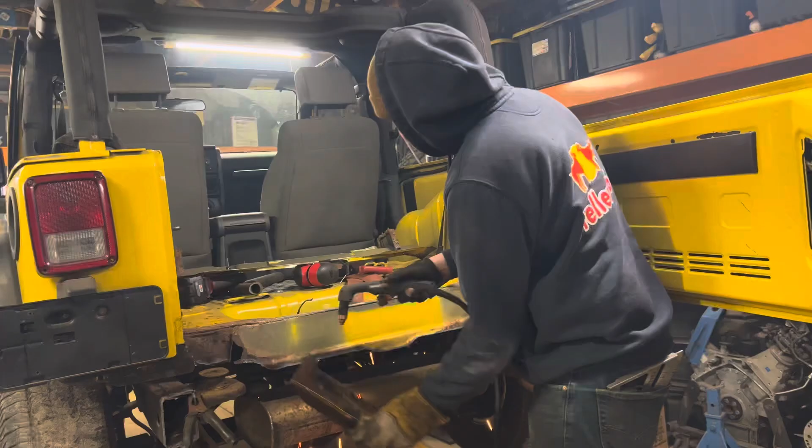You saw in that last clip, Nick actually cut the whole back piece out of the tub, and this is the final result after he replaced it. This Jeep was so rusty that the tailgate wouldn't even close because there were huge rust holes here, so he put a lot of work in to fix this, and yeah, it's a lot better.

And after those clips, an embarrassing amount of time lapsed, and we also opted not to build a rear bumper, just to put a crossmember in. So today I'm gonna make up some rear crossmember for this Jeep.

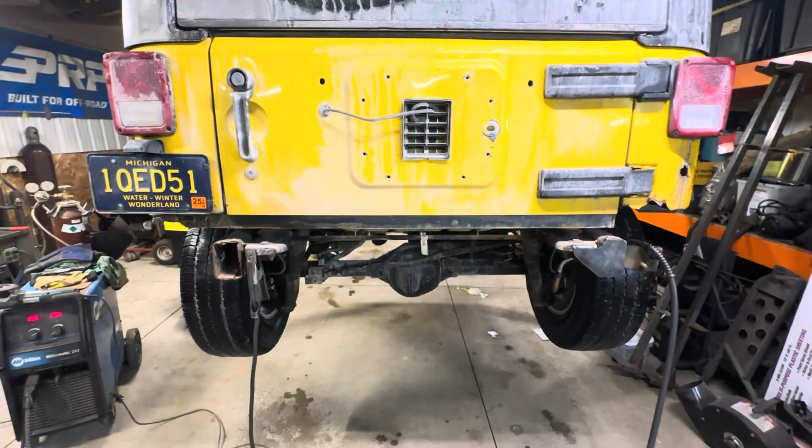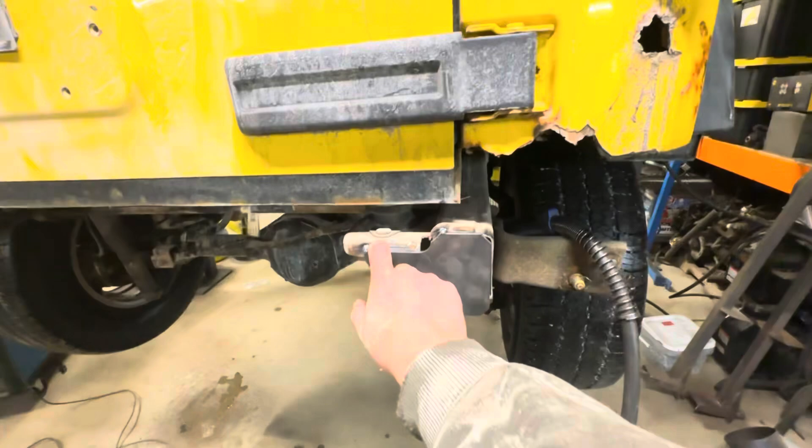I already did a little bit of preventative maintenance, some brakes on the front, and got that all wrapped up, but I've been putting off making this rear crossmember for a long time, so I'm gonna make up some brackets. I kind of already got one halfway mocked up here real quick. I'm gonna just buzz it in, put a bar across it, put a hitch in the middle of it, and toss this plastic bumper back on and go from there. Be something better than nothing and get us down the road.

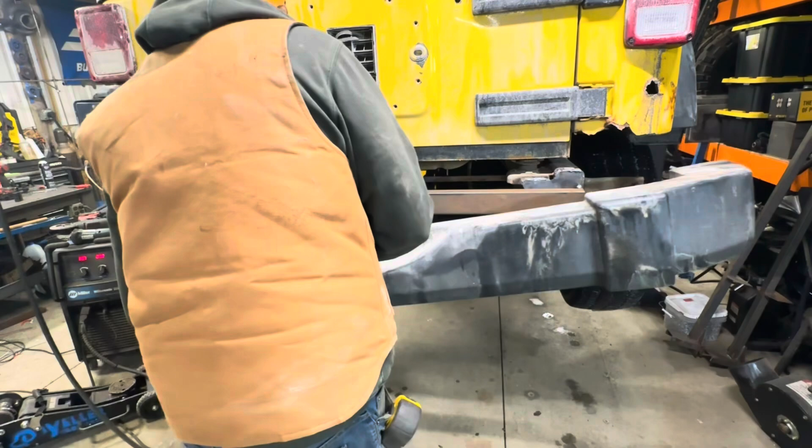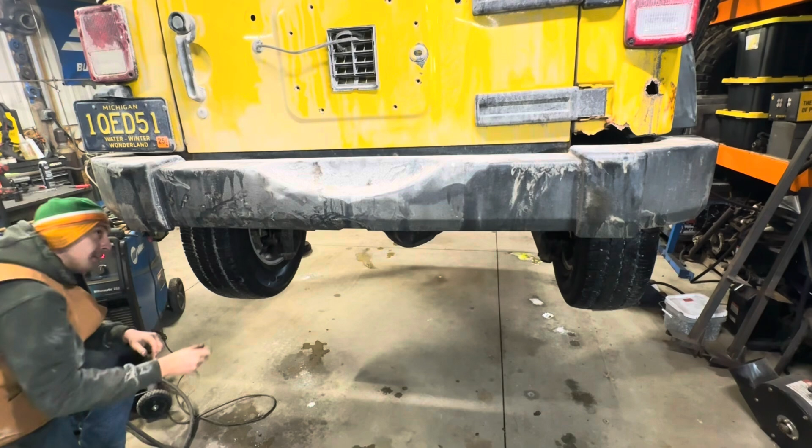It fits really nice.

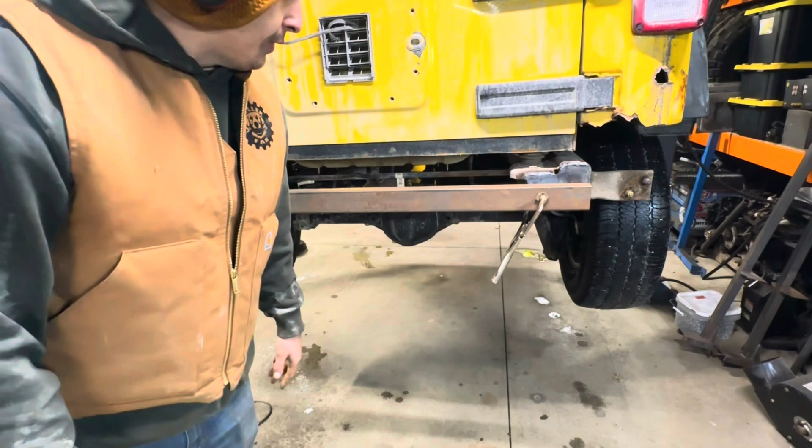This is, I don't know, 2.5 by 1.5 inch, probably just north of a 1/8 inch, maybe closer to 3/16 piece of square tube. I'm just gonna kind of eyeball this up.

I'll make up some gussets for a hitch mount. I gotta see if I can find a hitch mount that I can snag apart, because it would be nice. I might even add some plates on the side here to kind of cap this and give it some extra strength. I'll get this all tacked together and then put that bumper back on, make sure I got enough room down here to put a hitch, and if not, I'll cut my plastic bumper up so that I can, because I just want a hitch.

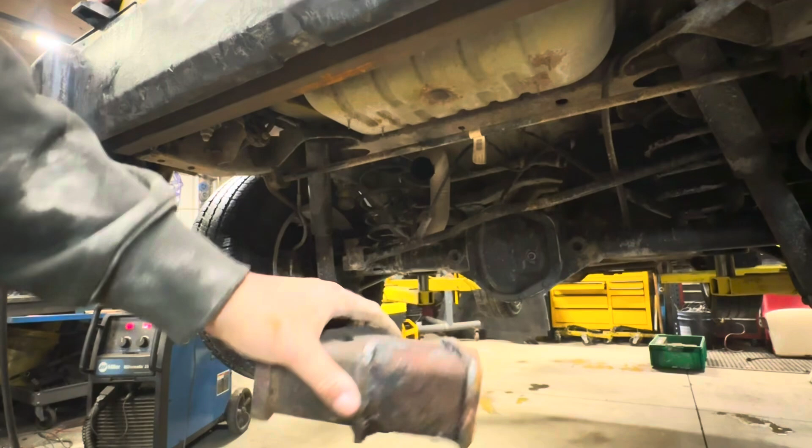Alright, I found, actually I'm pretty sure this is the hitch that was on here. So I'm gonna go over to the bandsaw and try and clean up some of this, get it closer, ready to cut, and we'll go from there.

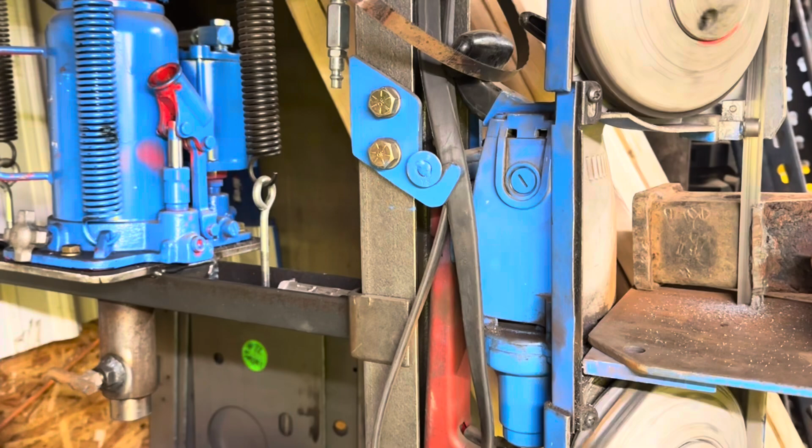All right, so that's at least roughed in, and now I can go over and get the grinder out and clean this thing the rest of the way up. So I got that cleaned up. Should be ready to get put on here.

Cool, make a gusset like this. Gusset like this.

Day 2. I have to get this done tonight because Beck has to drive to work tomorrow. So let me see if I can't knock this out today and have a nice, actual, workable hitch. Designed a few things up last night.

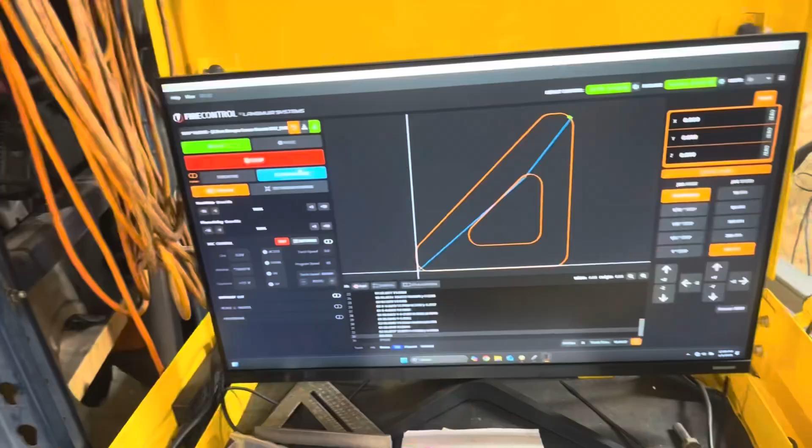So yeah, here, I'll show you. Here's a quick, just lower gusset. I'm gonna buzz one of these out and see how this looks.

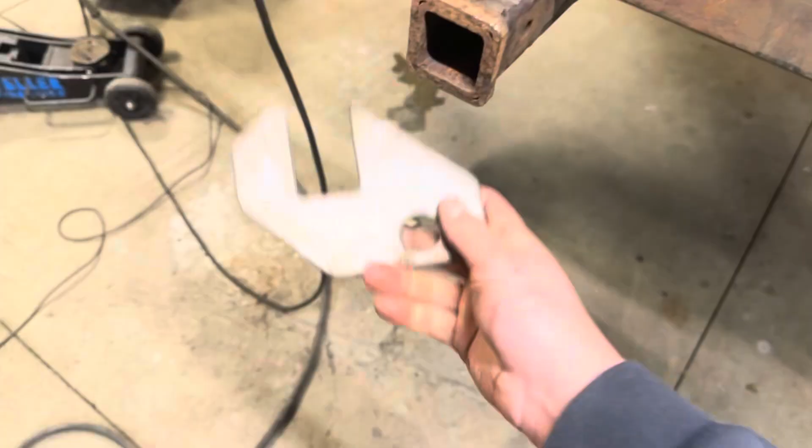I want to make some nice gussets for this to sit, so I have a little bit of grinding to do to get this all lined up. I gotta go cut another one of these real quick.

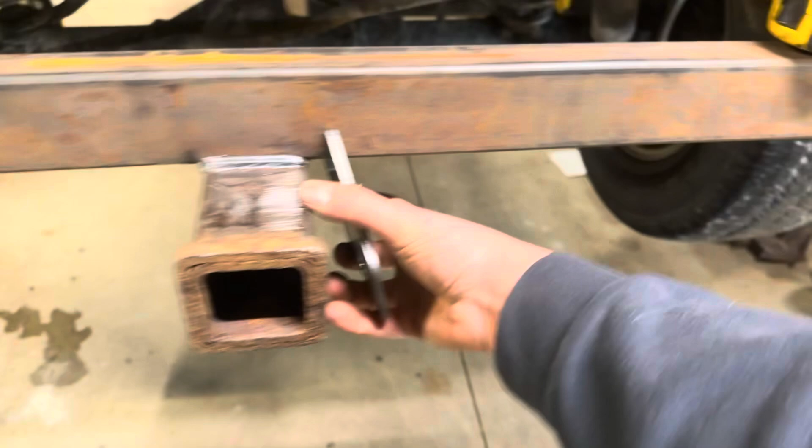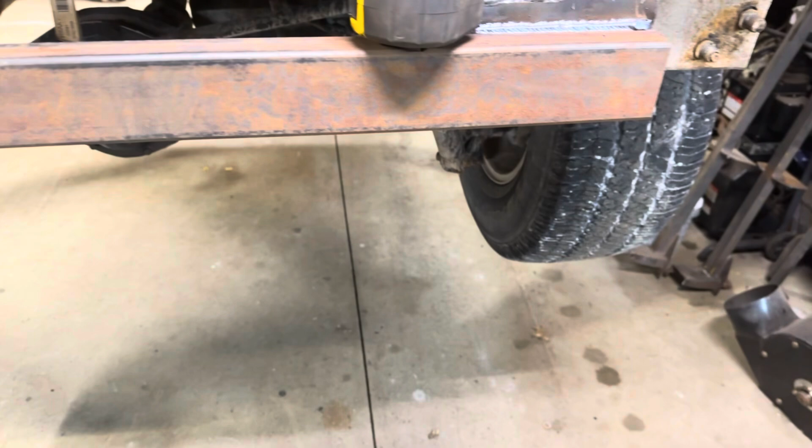I have some gussets that I want to put here, and I think I might even make some plates up for the side. I kind of like the idea of having a little bit of a tow point out at the edge here, like at the frame actually. So I might cut some of that up real quick and get this welded on, quick coat of paint on it, and off to the races, to the next thing. So let's cut one of these.

You know it's cold in Michigan when your plasma table freezes up.

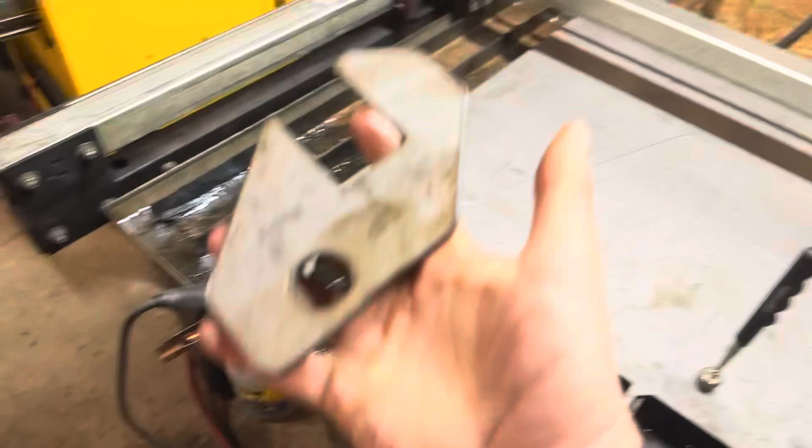Cool, alright, let's go clean these up and get them welded on. Got these plates, I'm gonna kind of grind these so they fit a little bit nicer. Let's get them put on. Yeah, be a nice little gusset, keep this thing kind of sturdy.

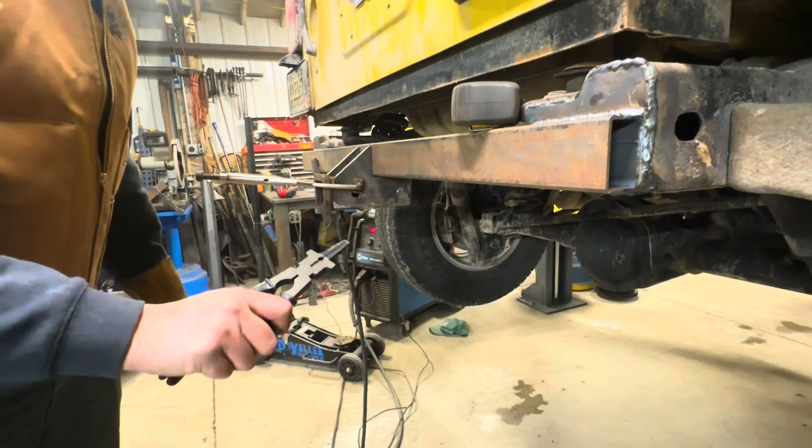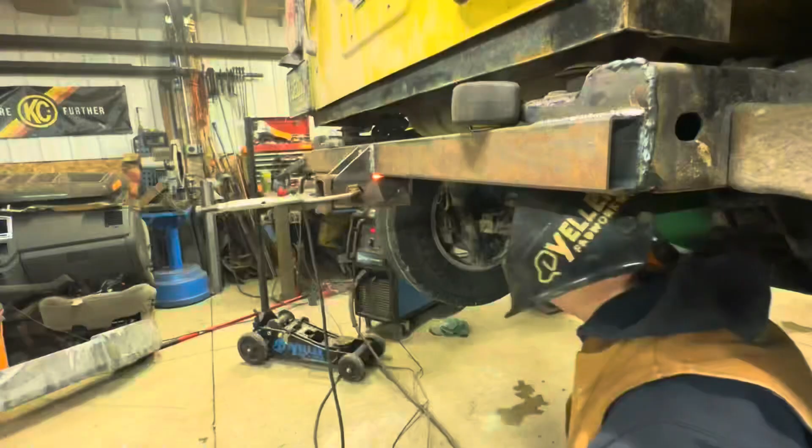Made up these little brackets. I want to put just a small bend in here, just so it fits up a little bit nicer. And I just got to make sure that I do opposites and that I don't do two of the same.

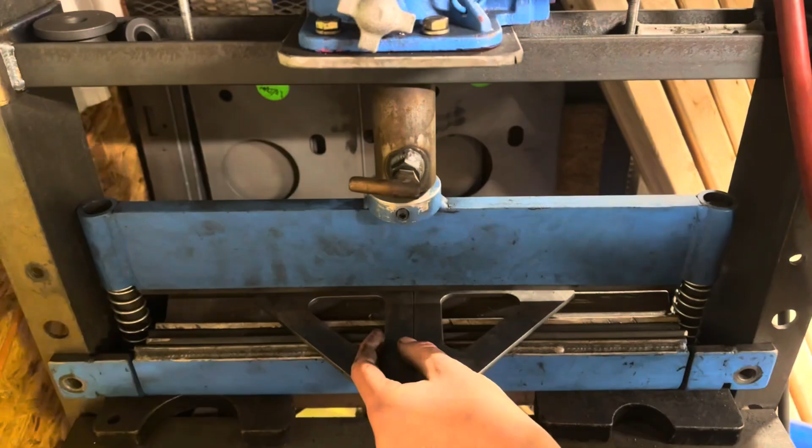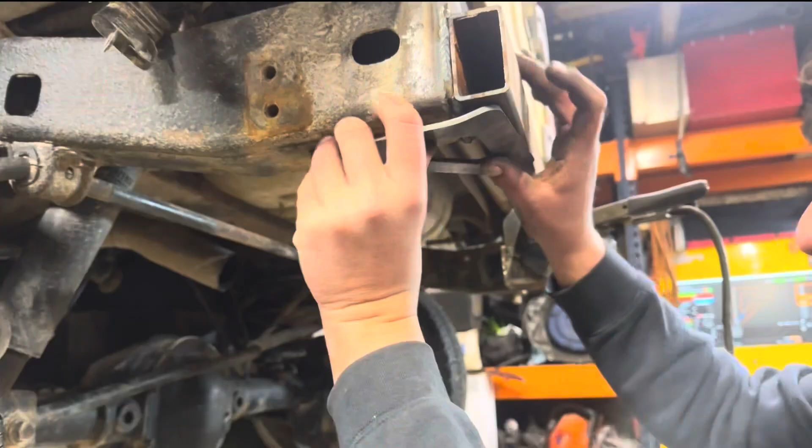That's about all I needed, just a small little kick. So let's go see how that fits and see if that'll do it. So you can see that little bit of an angle.

That's all I really needed, just something to kind of take up the difference between here and here. So I'll clean that up, get that buzzed on. That should be plenty of structure, just to kind of give this a little bit of a brace.

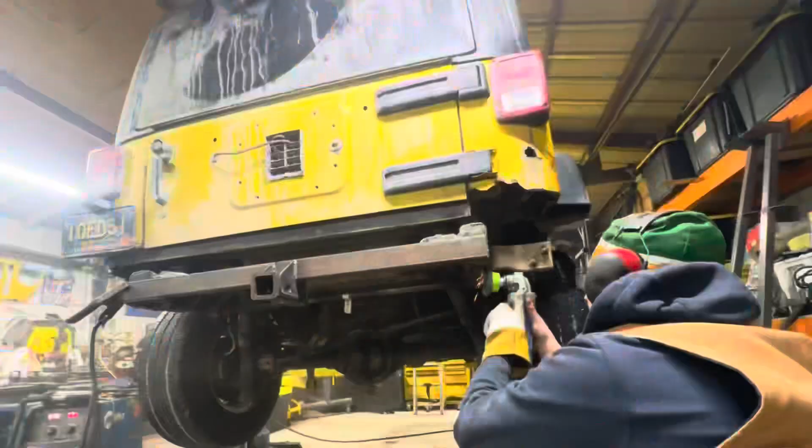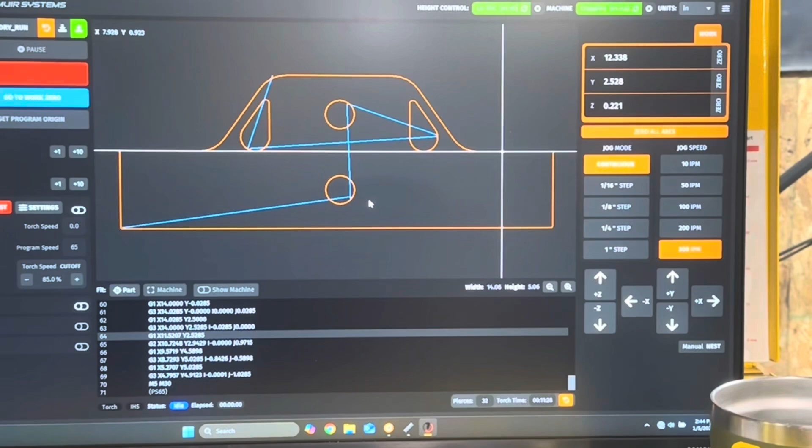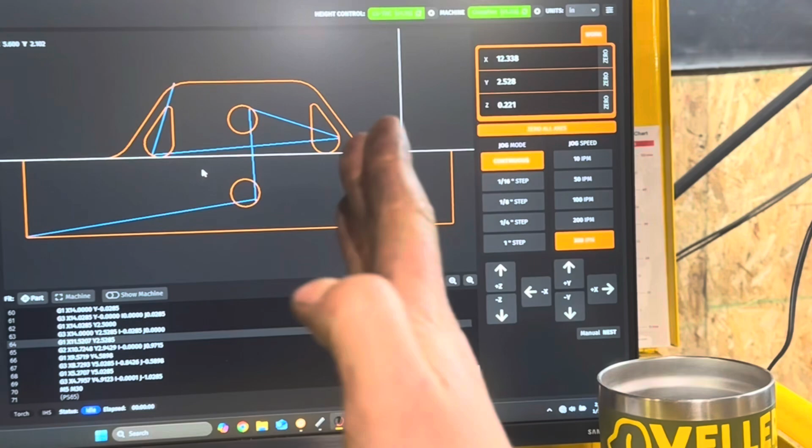Made a lower tie-in plate, kind of gave myself some spots for some plug welds, and then a spot to chain trailer on. I don't know, it's basically just for looks, and I'm hoping it acts as a little bit of an anti one of these.

This way, I got it. I think I got it. I like those plates there, but I'd like something kind of this way, so I'll show you. Let's cut one real quick.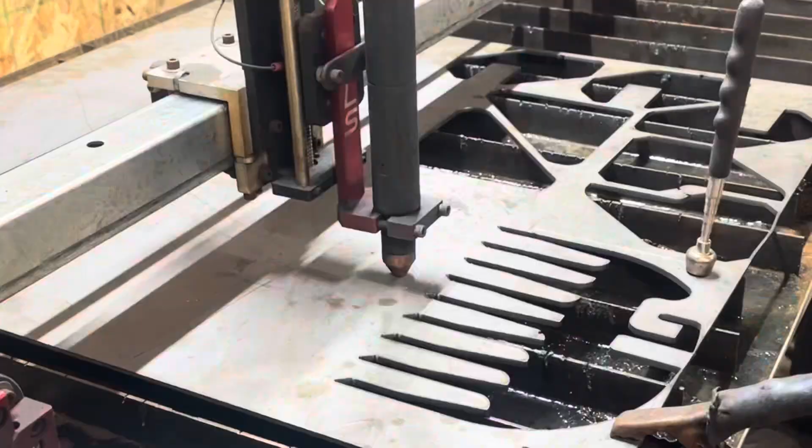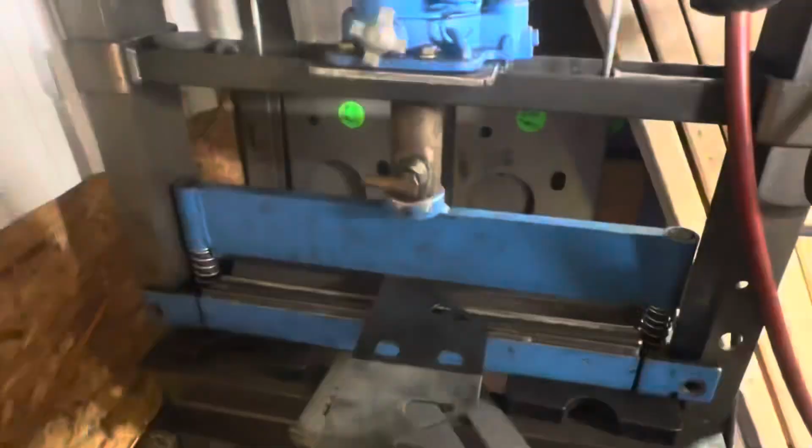Something simple, I just wanted to try and add something to keep this from wanting to do one of these moves, but I think that'll be nice. Plus, I don't know, sort of a spot to hook a chain into or something. So let's get that buzzed on, and then I think for now that's all I'm going to do on this.

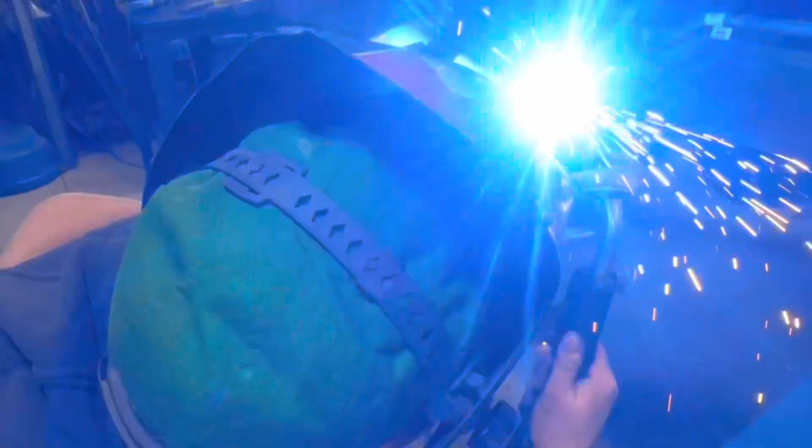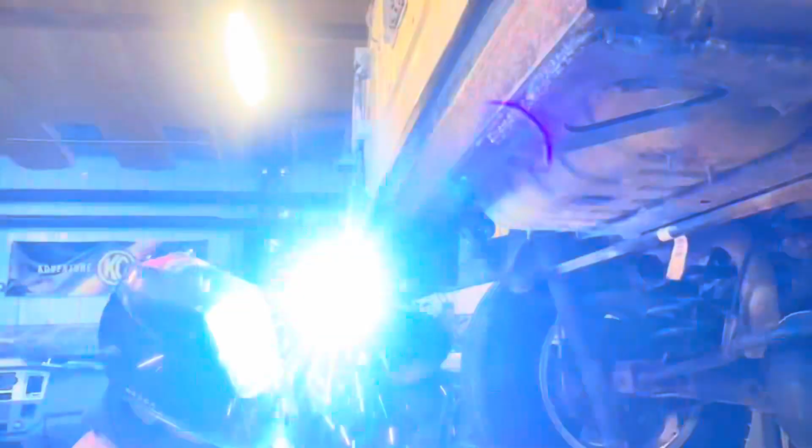Figured it'd probably be smart to have something to actually pull from on this. So let's see, I already know that I'm literally about to alter this because I can't stand how they send them.

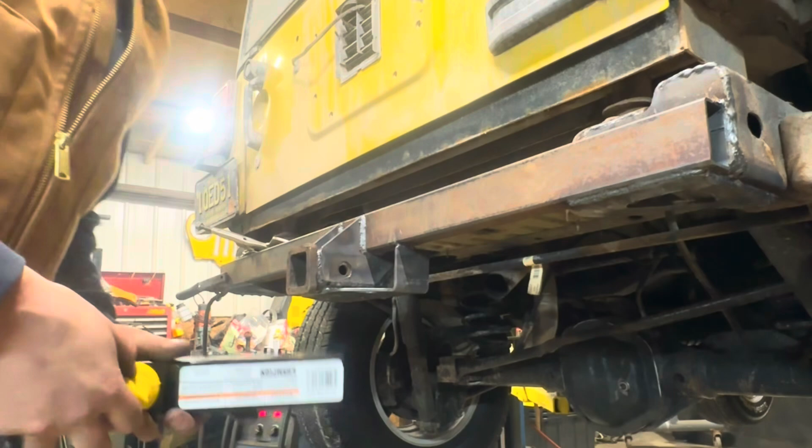But for the price, it's pretty hard to beat. Oh, it even comes with a pin. Nice, because I hate that they're like this, that's dumb. Put them like this. Yeah, I like them nice and flush like this. So let me mark that and I'll get that drilled.

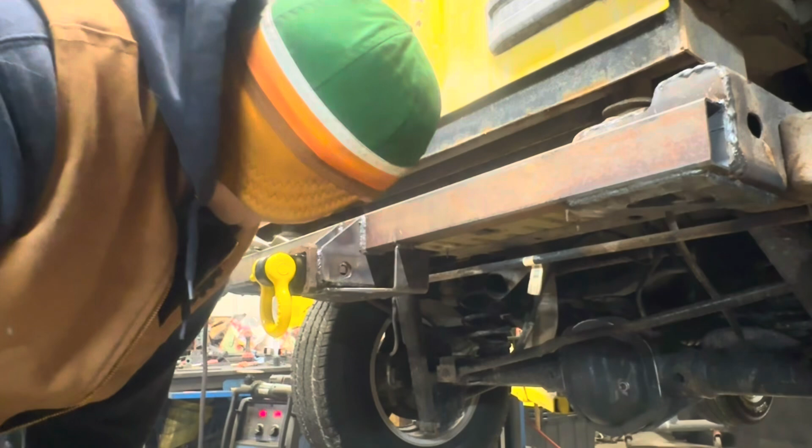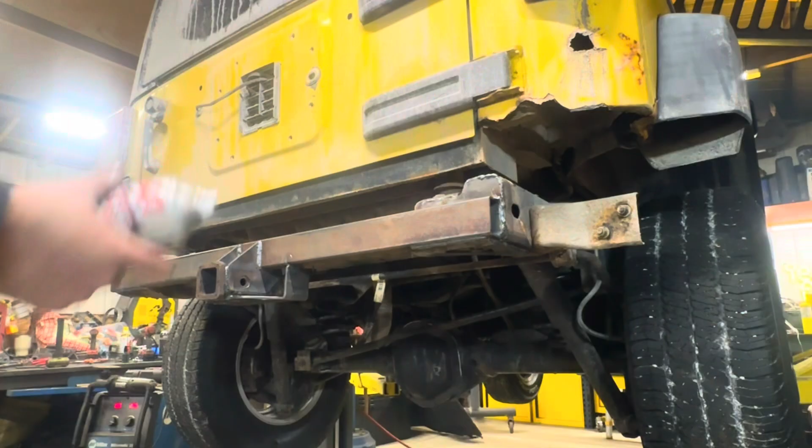I figure while I'm getting that other thing drilled and dealt with, I might as well get a coat of paint on this.

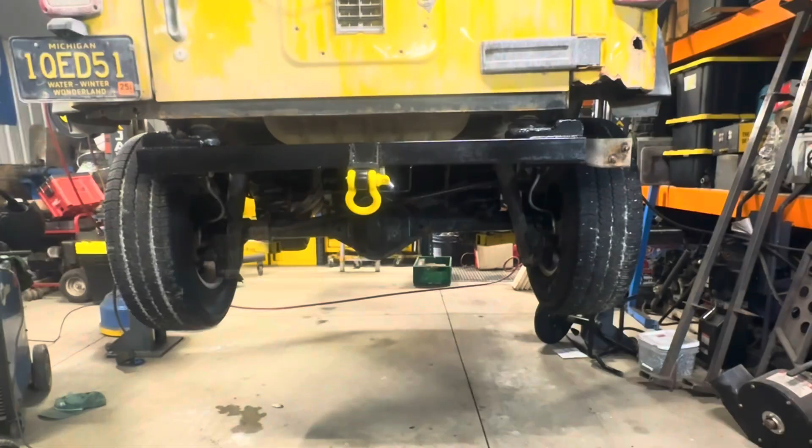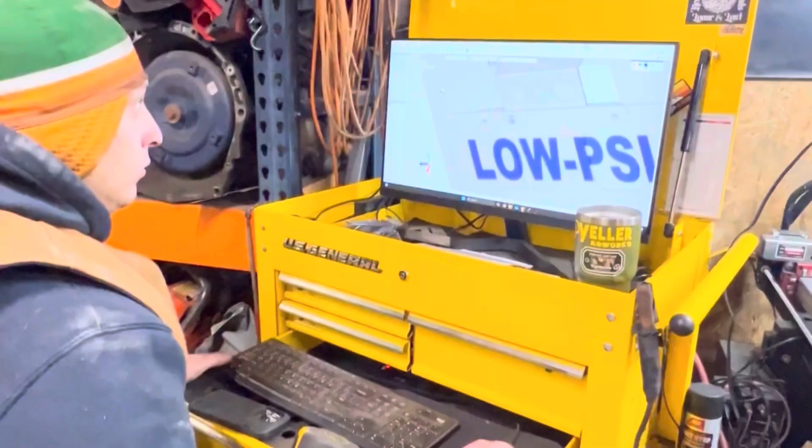After putting this bumper back on, Nick realized that the license plate mount broke, so we had to make a new one. The factory license plate holder broke off of the cheap Jeep, so we had to come up with something quick to replace it. Nick found a reference file on GrabCAD, then changed it up and made it his own, and converted it to 2D so we could cut it on the plasma table.

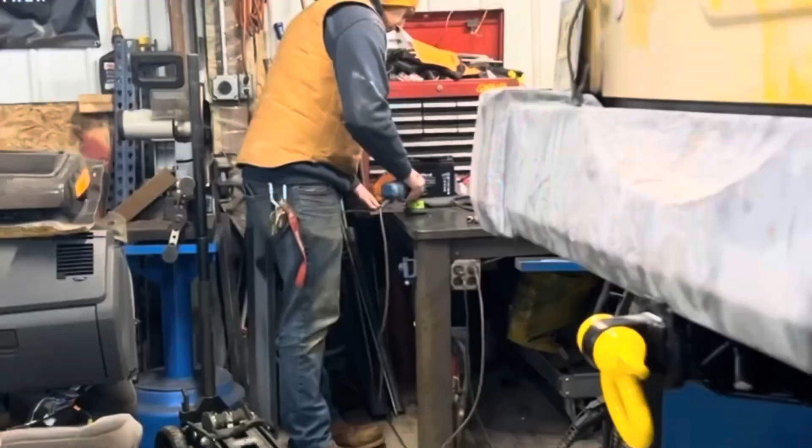Next, Nick worked on cleaning up that first cut, and I made the second cut. Now just a quick test fit because we didn't even know if that GrabCAD file was accurate, then bending it up in the press and chamfering the holes.

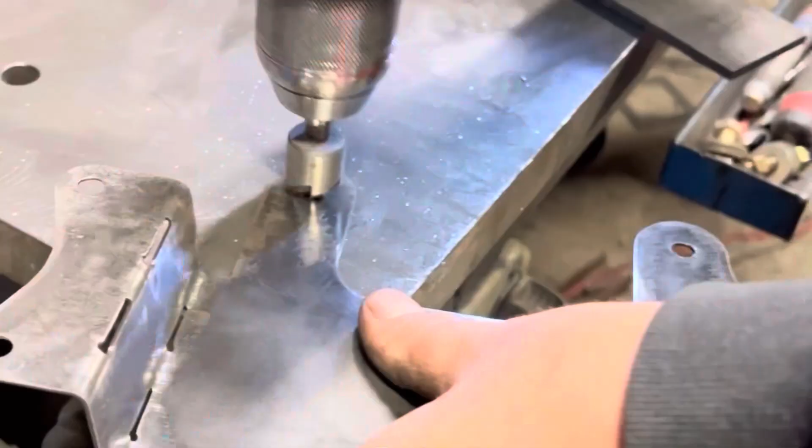And the final test fit, I think it looks pretty dang good. And here's the finished product, spray painted black.

I think that's a wrap. Got that hitch and license plate delete figured out. Maybe one day we'll address some of this rust and the hinges on this tailgate that don't work too good. But for now, we have brakes and a hitch and a license plate mount.